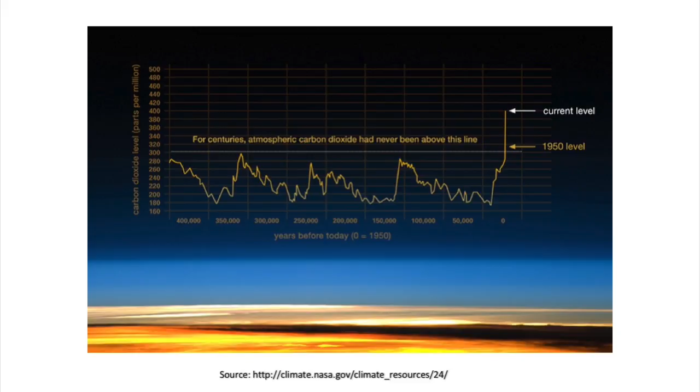Just to start off, it's hard to start a conversation about the environment these days without thinking about carbon dioxide in the atmosphere—you can see that graph. There's still some debate as to exactly what's entailed in creating these high levels of carbon dioxide, and to claim man is the only cause is probably crazy. But there's no question we've contributed fairly significantly, and we are off the charts in recent geologic history on these things.

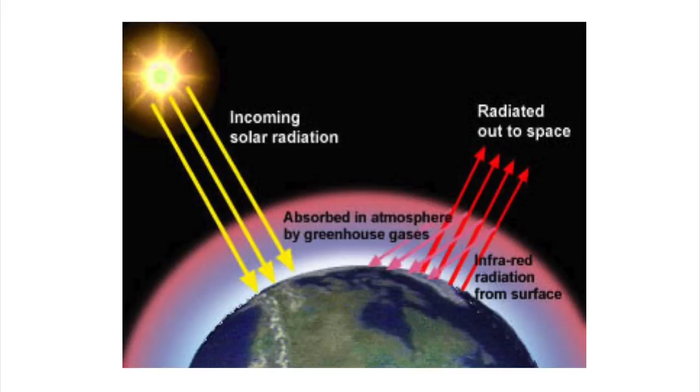I'm going to talk a little bit about the carbon issue related to wood very briefly, since someone else is going to talk about it. I'm not going to go into the basics of climate and greenhouse gases—I'll skip those two.

We know there's more than carbon dioxide involved—sometimes with wood we forget that. Particularly for those of you emphasizing biomass energy, you run into the argument: I'd rather leave the wood in the forest and let it rot versus burning it in a controlled environment. The issue is how you have that discussion—to a certain extent you're better off actually burning wood than letting it rot, in terms of the greenhouse gases released overall in that process.

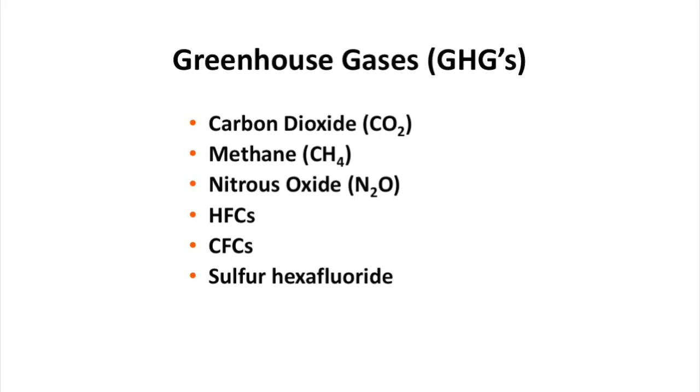As long as you're in a highly controlled burning environment with a really efficient system, you're better off burning it than letting it rot. There's less methane, for example, being given off. Same with allowing wood to burn in the forest naturally - there are lots more toxins and dioxins given off in a wild, uncontrolled forest fire than in a controlled burn. That's probably something a biomass person will talk about.

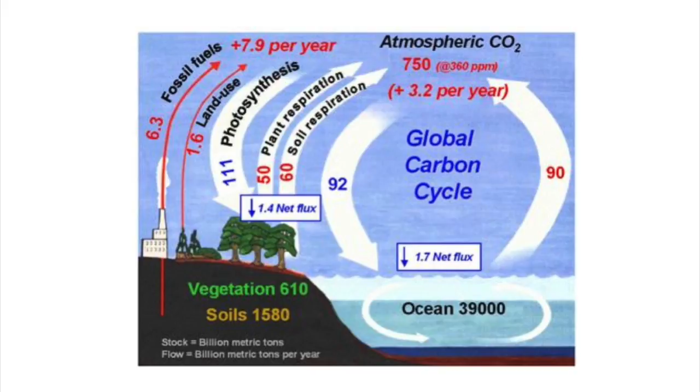That's why we bring about this. But fundamentally, we have this activity that's going on that we can talk about, and that's good. And so we get this giant global cycle going on that's gone on for hundreds of thousands of years. We know that's gone on for hundreds of thousands of years.

And we know that man has changed this significantly in the last - most conversations recently have been talking about the last 100 to 150 years. We've been blaming it on the industrial age. Intuitively, we've known that man's had other impacts.

I was just listening to NPR this weekend, and there's three scientists now whose research has been focusing on local climate change. But what they believe they can verify is they've been able to identify a pattern of climate influence by man over the last 5,000 years, specifically related to conversion to agriculture. They believe they've got an analysis of the data that suggests we can track man's impact due to land conversion going back 5,000 years. That's in that underlying land use category there, 1.6 billion metric tons a year, saying that there's a portion of this impact that goes back a significant amount of time.

Where that's valuable, in my opinion, my humble but genius opinion, is there's been a lot of conversation, and Dovetail has put a lot of effort over the last 10 years into convincing LEED that wood is better than any other natural choices. And in particular, we've lobbied heavily to get rid of the rapidly renewable version, saying that wood from a natural forest has a dramatically better impact than wood from, say, a cotton field or a farm field or any of those things - saying you don't do anything that wants to create more land use conversion from forests.

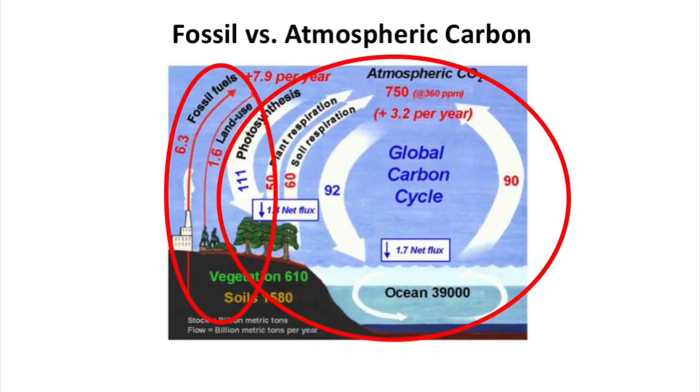Because this research kind of emphasizes that, saying we can point to that land conversion as being a significant contributor to climate change for 5,000 years.

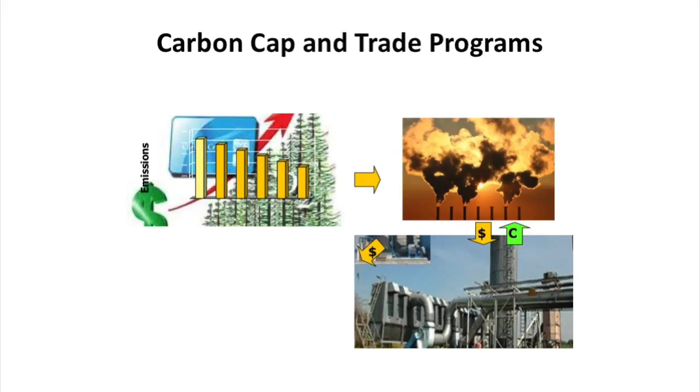So when you look at this big issue of global carbon around the world, everybody's probably heard of Kyoto, and everybody said, let's reduce our emissions from the 1990 level. We basically said there's two ways to do this: voluntarily or mandatorily. And the big thing we're trying to address is emissions. We can do that by regulating emissions, by incenting renewable or other choices, and we can try to get more trees to grow.

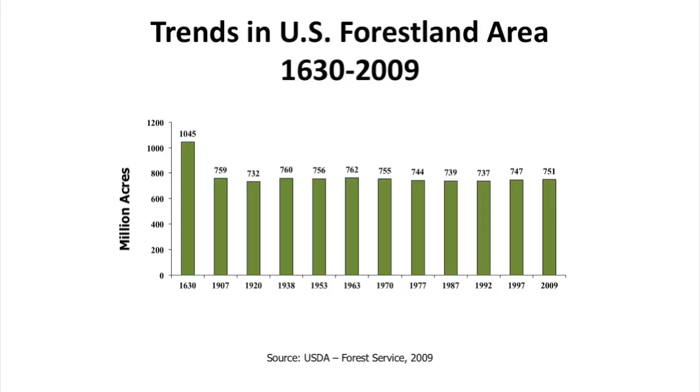It's pretty simple. So what's happening - let's talk a little bit about what's happening in the forest. I'm not going to go into detail again, but everyone's seen this slide 1,000 times. It basically shows our forest land area, which is often very confusing for non-professionals. They don't understand the difference between forests and forest land area - they think that harvesting a forest means we got rid of forest land, and they put those two together. So we always have to be careful; this slide actually deserves more explanation than it usually gets depending on the audience we're talking to. We've run into that over and over again - people confused that forest harvest gets rid of forest land.

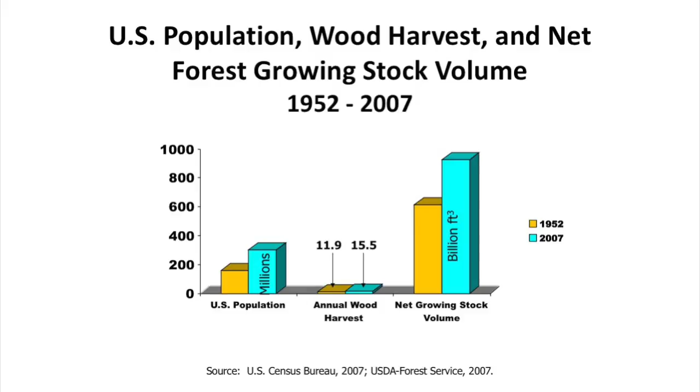For most people that doesn't make sense. They go, how can that be true? How can you cut down more trees and have more wood? So I think that's an opening discussion to a lot of things because it's a great statistic.

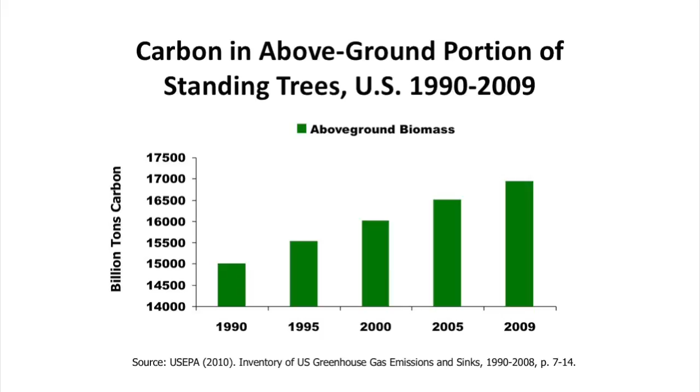So when you bring it back to carbon, is there more carbon too? This statistic shows that there's also more carbon being stored in the above ground portion of standing trees. So do those trees have more carbon? And how about the soil?

How are we doing in the soils? Are we destroying the soils? You can say no, we're even still storing about the same amount of carbon in our soils. So the soils aren't being destroyed in this process either. People are always looking for what's the hidden bad news behind the story, and there isn't much.

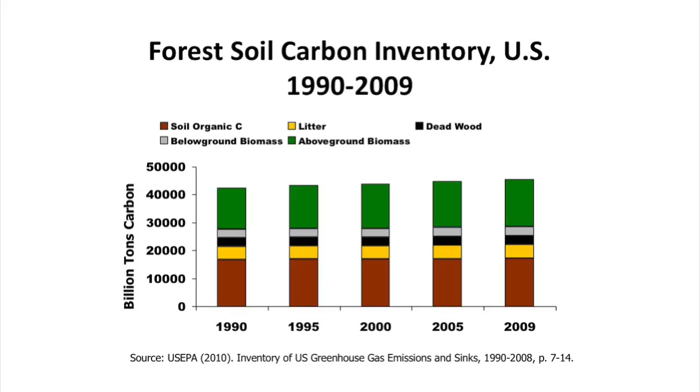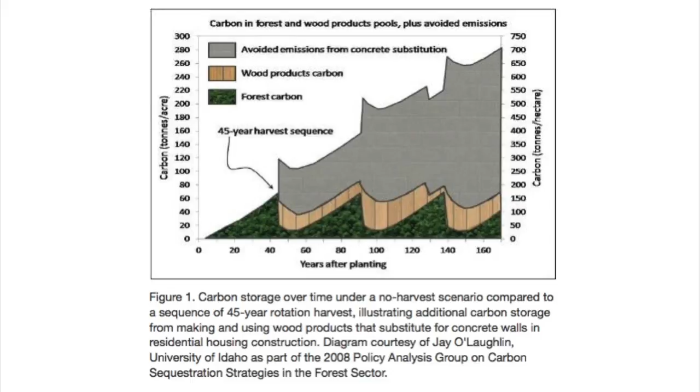There is some. This shows the cumulative effect of harvesting. This is one of those slides that shows the green at the bottom shows forest carbon storage through multiple harvest cycles, in this case 3.5. The tan intermediate area shows wood in storage, attempting to demonstrate that some of the harvested wood goes into storage for fairly long periods of time, and how it tends to accumulate over time. So you can see that the average stored carbon goes up over time when we put wood into durable use. This is another way of looking at it.

I don't know the document that Pat's referring to, but this is the Building with Wood document. Have any of you seen the Building with Wood document that Dovetail put out through Forest Innovation Investments? It's actually quite good. It's based on a German version that came out about 5 to 10 years ago. It's available to all of you, both in a form that's usable and visible in HTML format, so you can see it on your screen the way it would look.

Formatted for computer screens, it's also available in a printable format, so you can print it. Actually, there are a few books that have been made. It's got lots of really good information. We put a year and a half worth of work into getting good graphics, good statistics, and good communications aimed heavily at architects. This was the dominant target audience for this book, but it's about 24 pages of juicy tidbits of information about carbon storage and things. It's available for free, so I encourage you.

This is an example of one of those statistics. The goal is to show that through harvest cycles we get logs, those logs go to houses, and over time you accumulate houses. And as long as we have more houses today than we had in the past, we've got more carbon stored in houses, even if you're tearing them down every year. As long as you net more, you're net storing more carbon.

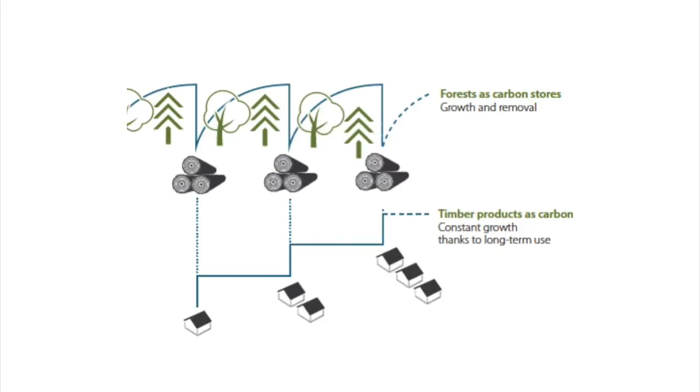As long as you have net more furniture out there than you had 20 years ago, you have net more wood stored in furniture. As long as there's a net increase in consumption items, you're getting net more carbon in storage. So that's another one of those issues that people need to understand. It's the net change that matters, not what the annual activity is. This is the statistic designed to help illustrate that.

So wood stores carbon, we know that. For any carbon scientists out there, this is kind of a reminder of the realities of teaching class. Photosynthesis is a very simple formula. I teach the introductory wood science and engineering class at the University of Minnesota, and it's also taken by a lot of environmentalists because it's a biorenewable resources class. We usually sell out at 100 students, and at the very beginning of the class I show them the actual formula for photosynthesis.

I tell them, just so you know, this formula will be on every quiz, on every homework, and on every test. So I'm giving you free information. I can tell you, I have never in my history had everybody get it correct, not on any particular one of those. 100% of the students have never gotten them all correct. So how you get people's attention on these very simple things is interesting.

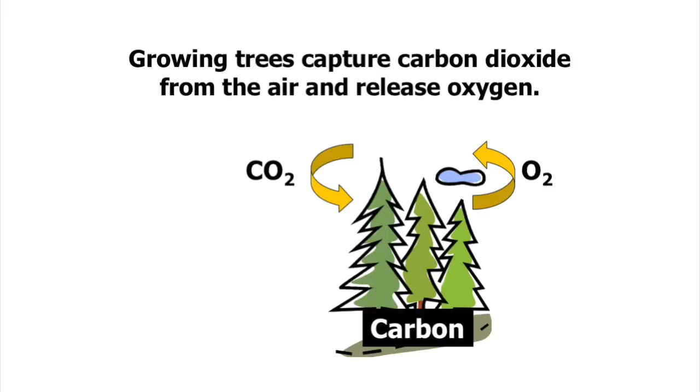This demonstrates that wood, as we know it, dry wood, is about half carbon. So there are some real significant benefits to using wood, storing wood, and dealing with carbon issues. This graph goes with the previous graphs showing that it's believed we're net increasing our carbon storage in products.

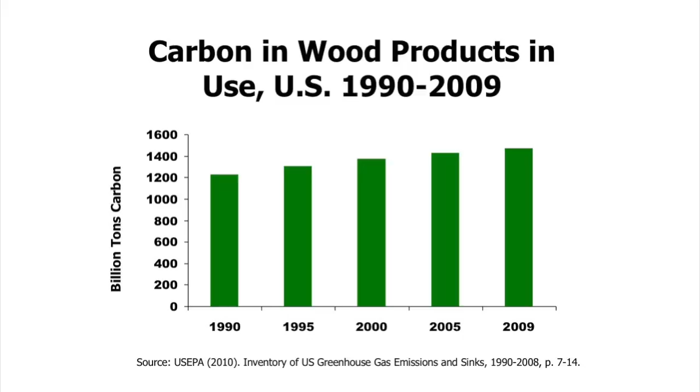So that's part of that. We are actually measurably increasing the amount of carbon stored, even though things are coming in and out of use. This is that short-term use question that says, yes, but we're going to throw furniture away in 20 years, or tear a house down in 80 years. You're going to go, yeah, but it doesn't matter. It's growing. This is just reinforcement to that discussion.

That is something that's hard for people to fathom. It's hard for people to understand. There are no fossil energy inputs into a lot of wood products. It's such standard practice for us, we take it for granted. But it's underlying data behind all of the conclusions in all life cycle assessments, that we're not putting other inputs into the process of making stuff.

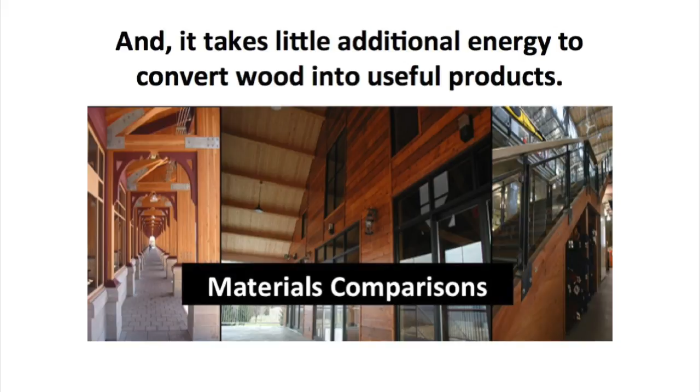So that's the basic truth. And so the result is, when you look at things like this, when you look at carbon emissions from all these different materials—framing, lumber, concrete, all these kinds of things—there are emissions on all of these. When you add in net emissions, including storage, you can see the wood products are the only ones that are negative.

So that's dramatic when you're looking at building anything. There's no other product, major industrial raw material, that has negative carbon emissions when you use it. So it's why it's becoming so popular, particularly in Europe. You're seeing the tall buildings movement, where we're starting to get 10, 20, 30, 40, 50 story commercial buildings being built out of wood. That's part of that movement, this carbon storage issue is in the background behind all of those things. So wood is really unique in that regard.

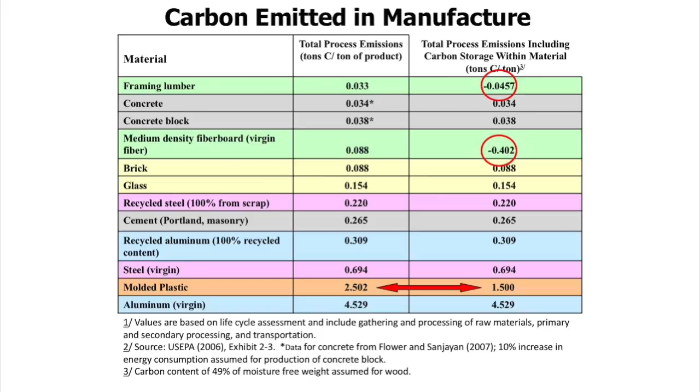You can see down the bottom, molded plastic—it does store some carbon, but it does not offset the emissions in the production of plastic. So someone says, well, plastic is made out of carbon? Yes, it is, but it takes lots of energy to make plastic, so it doesn't offset it.

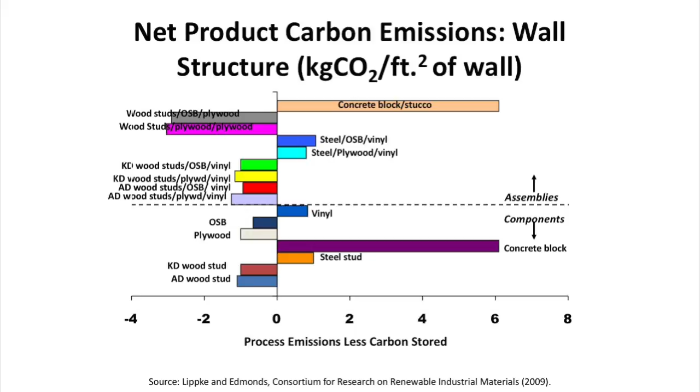So the storage capacity of wood is such that it helps the whole system work better. In combination, it significantly improves even steel—steel, OSB, vinyl, adding OSB or vinyl significantly improves that, just adding some wood to the package. You'll see this in some of the life cycle assessment examples I have at the end here, that you don't have to make a whole building out of wood, that's not what it's all about. The more we get wood in any way possible into buildings, the better those buildings perform, and the amount of emissions are reduced fairly dramatically. So in general, for every ton of wood used, you're saving 2.1 tons of emissions of carbon, or 7.7 tons of CO2 equivalents are avoided.

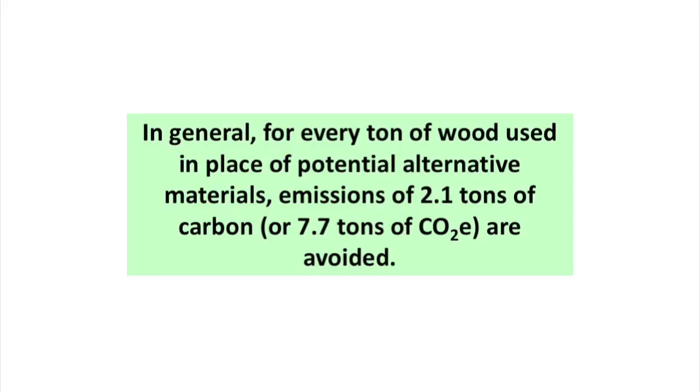So here's some examples, we're going to talk through the meat of the discussion here. I've got 4 case studies, and some of you may have seen these before, all of you may have seen these before. You won't have seen these exact slides before, because I just made them. But I'm going to look at an individual house, like a single house. I'm going to look at a school, an Olympic facility in British Columbia, and that last one's—I must have been eating M&Ms when I did that one, that's supposed to be Minnesota. So an apartment building that's being constructed in Minnesota. So I took 4 examples.

Increasingly, there are lots of examples out there. There have been a lot of good life cycle assessments done of buildings recently in the last 3 years, and there's lots of good data about how wood in buildings is performing from a life cycle assessment. But I tried to pick 4 diverse examples.

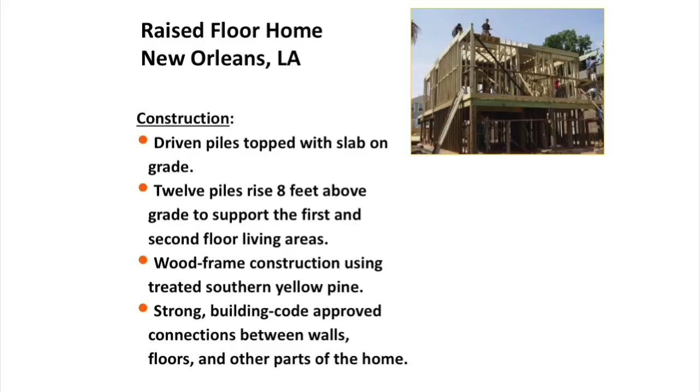Let's look at this raised floor home in New Orleans. Here's the analysis, and here's a description of how it's built. There's a little picture of it, you can see it from where you are. Basically, there's a lot of wood used in this home. It's got wood pilings pounded into the ground, it's a 2-story built out of wood, and a lot of it's yellow pine, and all those kinds of things.

If you look at it, 15 cubic meters of wood were used, which sequestered about 30 metric tons. If you remember the last statistics, that's roughly 2.1 tons per cubic meter, approximately. Then there's avoided greenhouse gases of 60 metric tons, and total carbon CO2 equivalent benefits of 90 metric tons.

When you hear the climate change discussion, think of these numbers when you talk about what's accumulating in the atmosphere annually. These numbers in each of these buildings, when you add them up, are having a significant impact on total carbon emissions, especially in really big buildings. You actually can have a measurable impact on carbon emissions in a region by doing things like some of these big buildings. So if you want to compare the impacts, this raised floor home in New Orleans...

The carbon savings is the equivalent of taking 16 passenger vehicles off the road, or the savings of enough energy to operate a home for 8 years. So this one home had that kind of an impact. There's an exponential impact to doing this, even in a single residential building.

Let's go to Corona, California, and look at an elementary school. Elementary schools aren't going to be as wood intensive as a residential building, most likely, but with the wood frame, the walls, the roof, and the second floor level floors were all wood in this case. So this one did have a lot of wood in it. It wasn't almost 90% wood like the previous one, but this one does have a lot of wood in it.

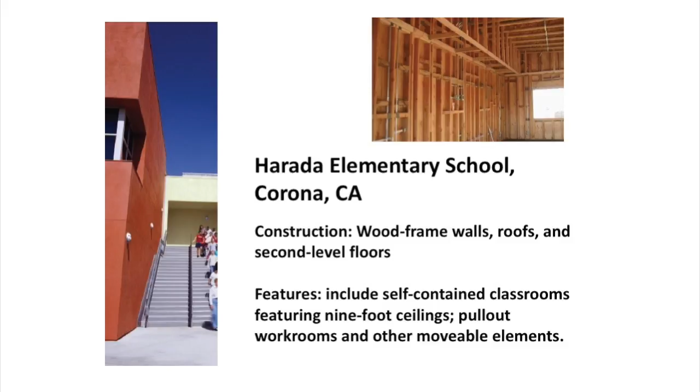This is a normal classroom with all the different kinds of rooms you get in a normal elementary school - bathrooms and everything, all the kinds of things you'd expect. So there's nothing unusual about this building and its performance other than it added a little bit more wood.

In this case, 4,000 cubic meters of wood were used. It sequestered almost 3,500 metric tons of carbon dioxide equivalents, with carbon equivalents of 7,400. And the total carbon potential benefit is almost 11,000 metric tons.

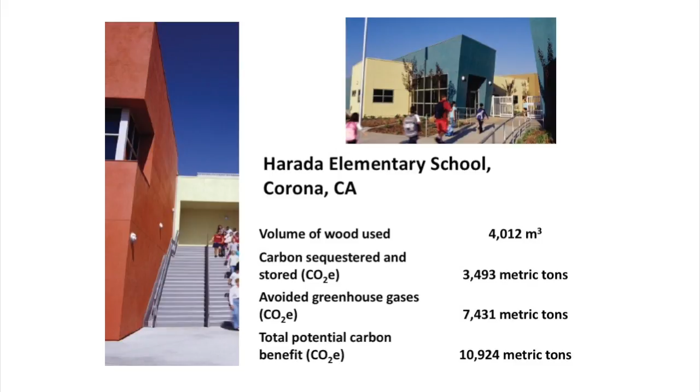So you're having a very measurable impact on the environment by sequestering this kind of carbon in this building by using wood. For the layperson like me, if you look at the carbon savings, it's the equivalent of 2,087 passenger vehicles off the road in a year. This one school building is the same as taking 2,000 cars off the road for a year. It's also enough energy savings to operate the equivalent of one home for about 920 years.

So you can grab all kinds of ways to make this comparison, trying to be a little random, but trying to demonstrate the relative impact that you can have with an individual building. I think that's the goal of these kinds of things. We have other building examples.

This one's my favorite - this is the Richmond Olympic Oval in Richmond, BC. If you've been there, it's quite a building. I like it because it used 1 million board feet of SPF. Technically that's called a bunch of wood - if you're professionals, probably don't use that kind of language, but it is. And it was dominantly in the roof. So this is a case where you don't have to use it everywhere to have a huge impact. 1 million board feet went into the building, dominating the roof.

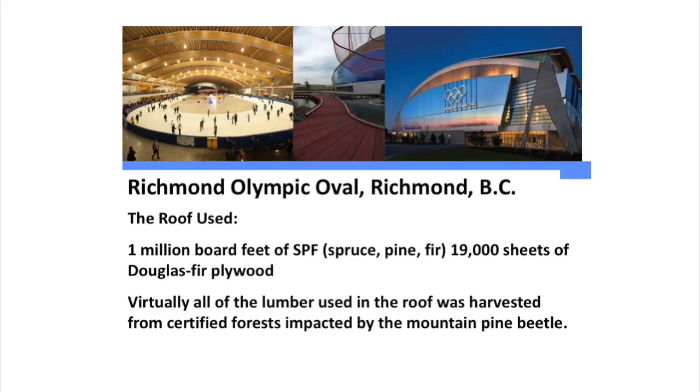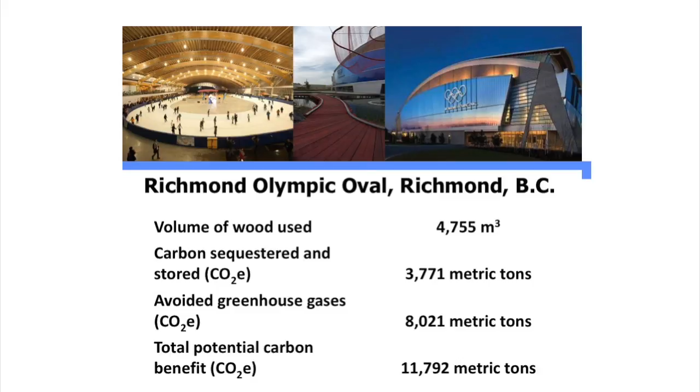In this particular case, they were able to utilize wood from mountain pine beetle problems, so they're using wood that was killed in other ways. The volume of wood is about just under 5,000 cubic meters, and the amount of carbon sequestered is just under 4,000 metric tons of CO2 equivalent, and almost 12,000 - a significant benefit. So just doing the roof can have a dramatic impact, equivalent to taking 2,200 passenger vehicles off the road.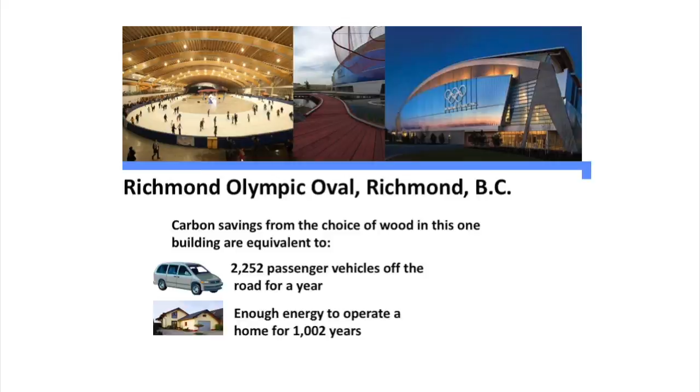Or enough energy to operate a home for 1,000 years. So reducing emissions, into that respect, these are—you can demonstrate really big impacts. And so I don't know why you would have an argument about whether you use wood or not in these cases. Also, it's a beautiful building—pretty spectacular. So it's not only a great choice environmentally, it's just how do you get nicer than that? And I have to add an aside if I can, because for years we've been having a debate at Dovetail

About why wood in a room feels good. And there's now research coming out of Germany that's actually demonstrated why—we always intuitively thought we knew why, that when you go in a wood room it feels more comfortable than a regular room. There's research in Germany now that's demonstrated that the acclimatization factor of wood—meaning its ability to give off and regulate relative humidity—if you have a sufficient amount of wood in a room, the reason it feels more comfortable is that it has a stabilizing effect on the relative humidity in the room. They can actually measure that stabilization. So when you go into a wood room and think, oh, this feels really comfortable, it's because it does—it's got a more stable relative humidity than other rooms. So that's my shameless side pitch for wood libraries.

So this gives you an idea, the summary. And then the last one we're going to talk about is the Copperfield Hill Apartments in Robbinsdale, Minnesota—spelled Minnesota right this time. And this is just a traditional apartment building in the suburban area of the Minneapolis Twin Cities area.

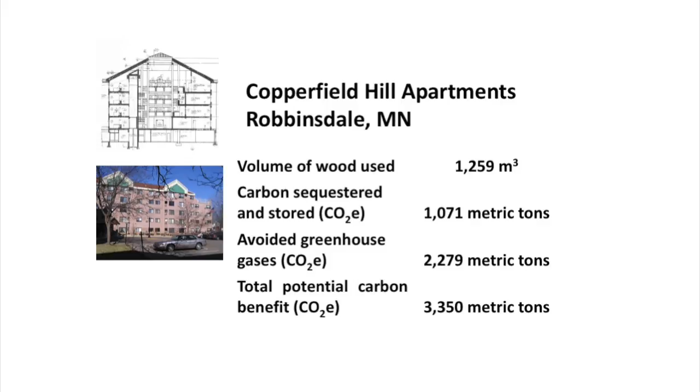And this one's looking at the volume of wood used. You get the same kind of numbers in slightly smaller volumes. So it's the same story, told over and over—it doesn't matter the building, you don't have to do all of any building, the same story is true. You're having a dramatic impact no matter what you do. And again, this one's just showing different proportions, same result. That's all you're getting out of this. So that's all I'm talking about.

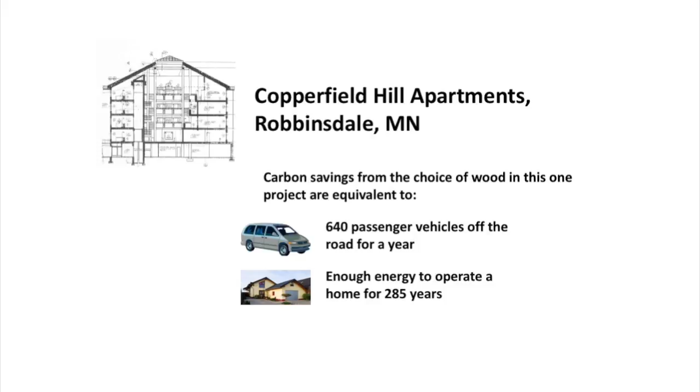So, any questions about those four examples? No? So basically, if you're having a discussion about wood, carbon is the fundamental focus of so many things today—there are so many countries for which carbon is the focus. In the Southeast, you're pretty familiar with that, given all the export of biomass to Western Europe. And part of this is giving you some of the information, trying to highlight some of the parts and pieces related to questions we usually see being asked, and some of the data on wood in general that allow you to have those discussions.

And the fundamental basis is that we've demonstrated over the last 50 or 100 years that we can use wood and have forests increase. That's pretty dramatically unusual—there's no other material that can claim that, and there's no other material that you can actually have more of when you use it.

And often in that debate, people ask you—they don't believe that statistic. So to explain that discussion, we often use the example in agriculture: say you have an apple tree and an orange tree, and everybody only wants apples. Five years down the road, what's the likelihood you have orange trees? Or ten years down the road? The answer is you won't—you'll convert those orange trees to apple trees if people only want apples. And the same is true with forests: if we stop wanting forests, then we're not going to have forests.

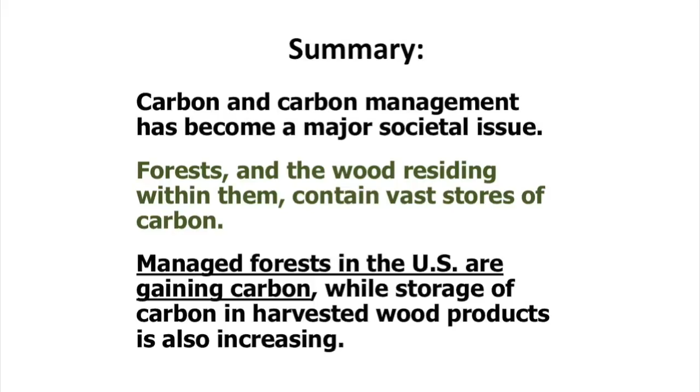And well-managed forests are gaining carbon and all those benefits. So there's really very little bad news about it. So, obviously, if you're talking about carbon or any environmental issue, wood is clearly part of the solution.